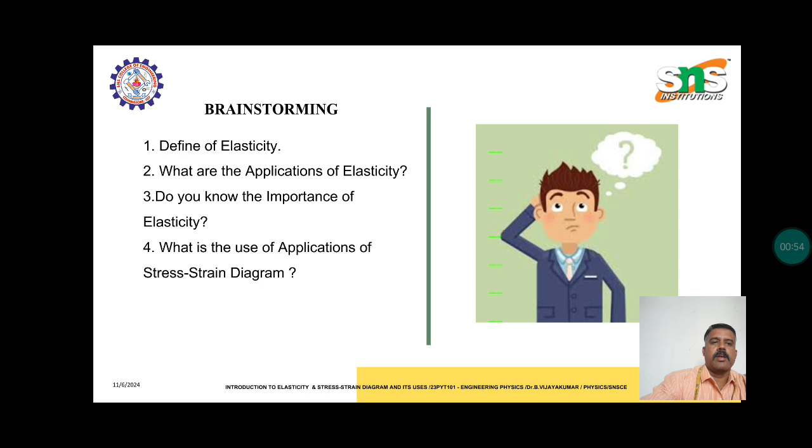In the brainstorming session, basic questions will be asked from the student side. Define elasticity. What are the applications of elasticity? Do you know the importance of elasticity and what is the use of stress strain diagrams? By finishing this PPT, you get all the question answers.

So the introduction to elasticity. Elasticity is the measure of how much a material deforms in response to applied force, the ability of a deformed material body to return to its original shape and size when the forces causing the deformation are removed.

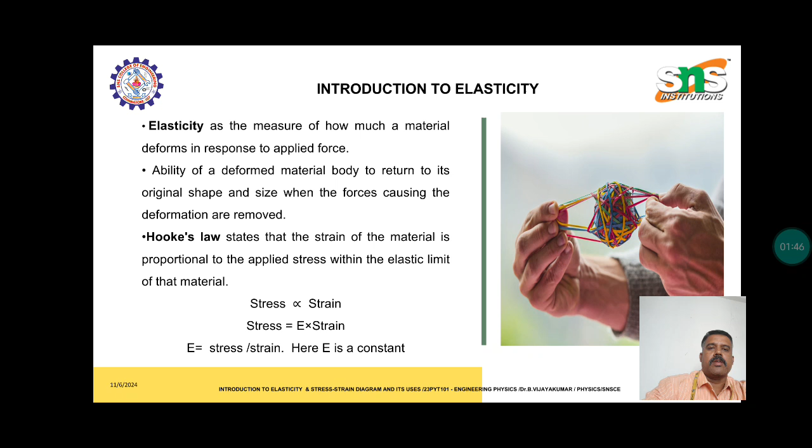Hooke's law states that the strain of the material is proportional to the applied stress within the elastic limit of the material. So stress is directly proportional to strain. Stress is equal to E into strain. E is the elasticity and it's a constant.

Stress strain relationship. The stress strain relationship describes the material behavior under applied force. It's a crucial aspect of understanding the material's mechanical properties. Stress is defined as the force applied per unit area of a material. Strain measures the deformation of the material in response to stress, represented as the change in length divided by the original length.

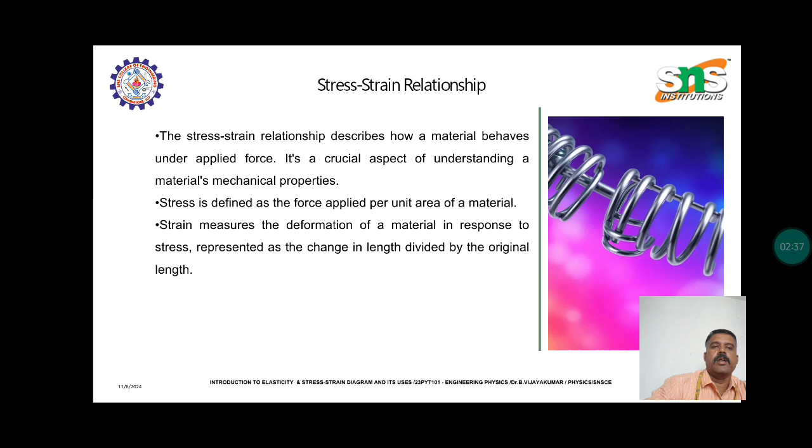So elasticity is the property of a solid material that it regains its original shape and size after the removal of the applied force. But plasticity is the property of the solid material that it does not regain its original shape and size after removing the applied force. So Hooke's law is a principle of elasticity. The strain of the material is proportional to the applied stress within the elastic limit.

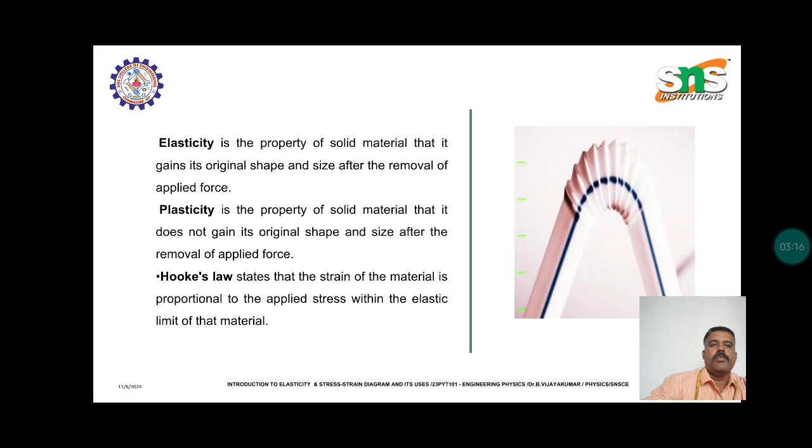The importance of understanding elasticity. Understanding elasticity is crucial for designing and building structures that can withstand loads and remain stable. Bridges. The elasticity of steel and concrete is essential for designing bridges that can safely support traffic loads.

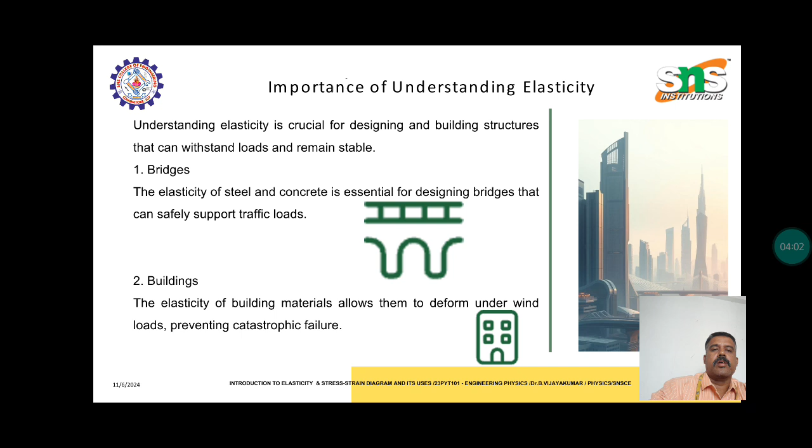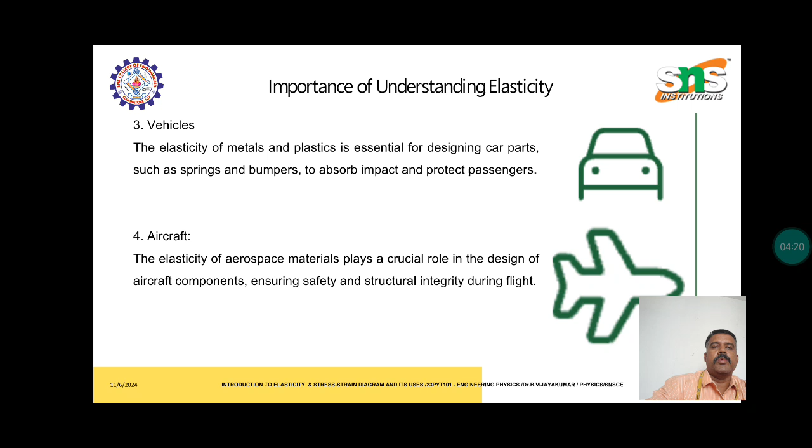Buildings. The elasticity of the material allows them to deform under wind load, preventing catastrophic failures. Vehicles. The elasticity of metal and plastic is essential for designing car parts. Aircraft. The elasticity of aerospace materials plays a crucial role in the design of aircraft components.

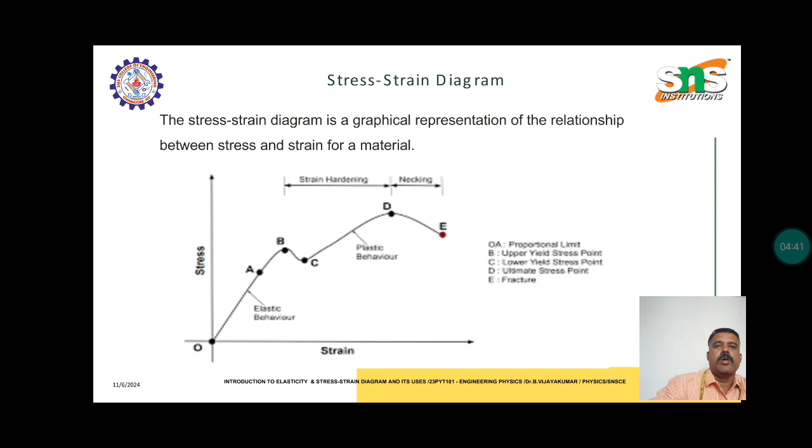This is the stress strain diagram. We form stress versus strain for each and every material. We get certain characteristics of the material represented in this diagram. So we discuss them one by one: elastic region, yield point, plastic region, ultimate tensile strength and fracture point.